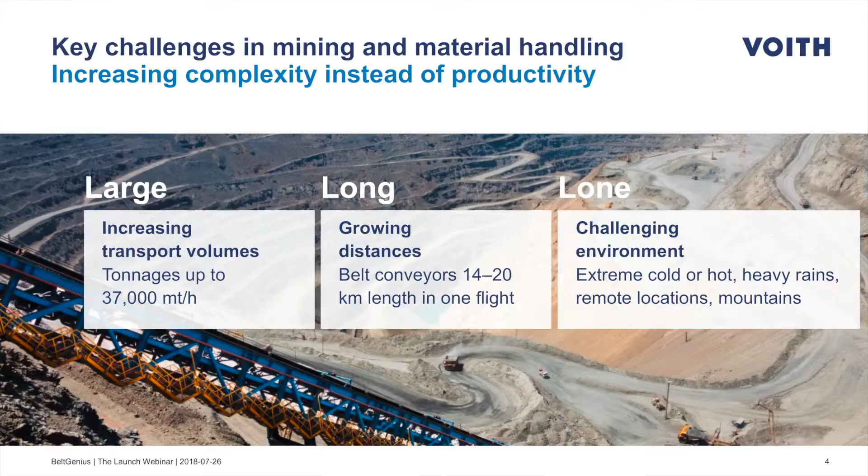These 3 L's lead to increasing complexity instead of increasing productivity. We all know an increase in complexity rarely is a profitable factor. Instead, risk for unexpected downtime is growing. No possibility to build challenging conveyors redundant. Conveyors are built to work reliably, not to be efficient. Economic pressure is huge to raise productivity.

As an industry, we have to ask ourselves, are we stuck in an innovation rut? Reluctance to adopt new technology in mining led to an innovation rut. Adoption of digitization solutions bring operational and qualificational risks. The risk of producing huge amounts of data with no sense is obvious.

I promised you to take the shortcut from buzzwords to business value in no time. Here we go. Whatever the buzzwords are, our industry is still facing familiar and down-to-earth problems that were not being solved satisfactorily to this day.

Let's take a look at the belt conveyor technology and operations. Leveled costs per ton and kilometer is subject to great variation. There is plenty of data, but no distillation of meaningful information. Shortcomings in systems, skills, awareness, no benchmarking to others. System downtime is just a minor incident away.

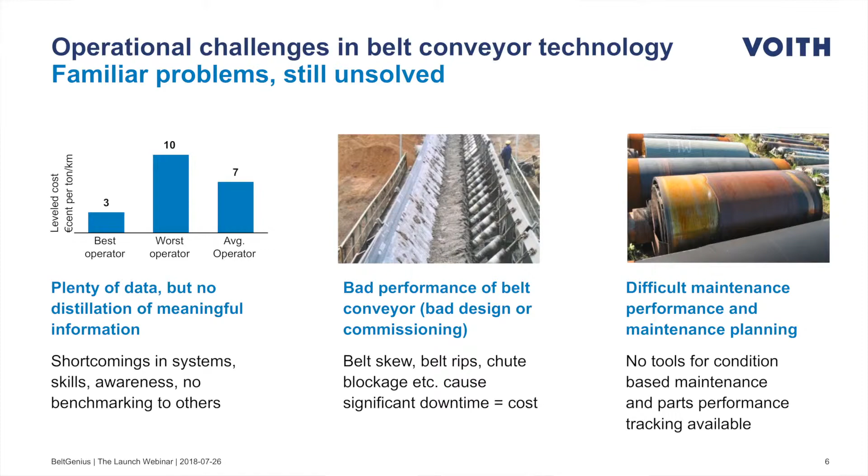Now, you might have guessed it. We have good news for you. The Voith BeltGenius product family has been designed to take on those familiar problems once and for all. Manfred, your turn. Welcome to our webinar.

I'm extremely thrilled to introduce you to the next level conveyor performance with the BeltGenius product family. We have been working on this solution for more than 3 years, and I can't wait to see it in action with new customers across the globe.

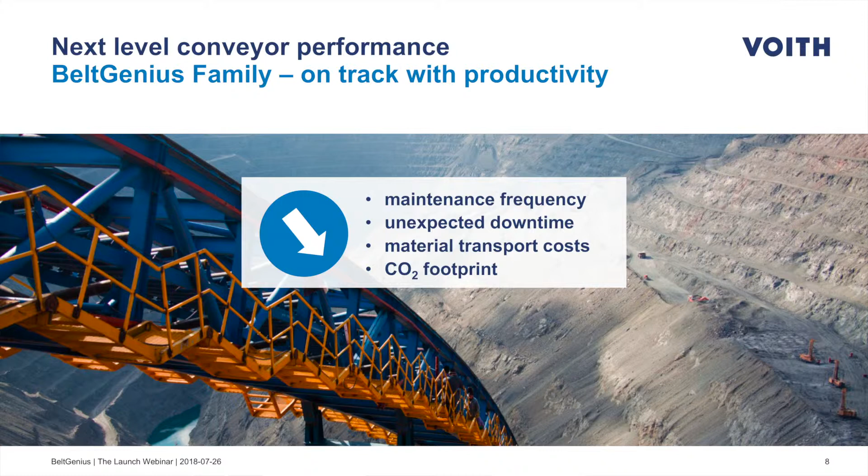As we said earlier, we want to show you how small investments in digital solutions can enhance your mining productivity, and BeltGenius is just about that. It is a product family for monitoring and optimization of belt conveyors and entire conveying systems. In terms of productivity, you can effectively reduce maintenance frequency, unexpected downtime, and total material transport costs considerably. Furthermore, Voith BeltGenius is also helping mines to reduce their CO2 footprint.

So how do we do that? The BeltGenius family currently consists of two brothers. Say hello to BeltGenius Eric and BeltGenius Alex, and you can say goodbye to performance issues and conveyor misalignment.

Many of our customers share the same problem. They lack control. Condition monitoring of belt conveyors or benchmarking of system components based on operating data have been almost impossible to implement. Causes for unexpected failures, downtime, excessive energy consumption, or shortened service life of component often remains undetected. That's when ERIC comes into play.

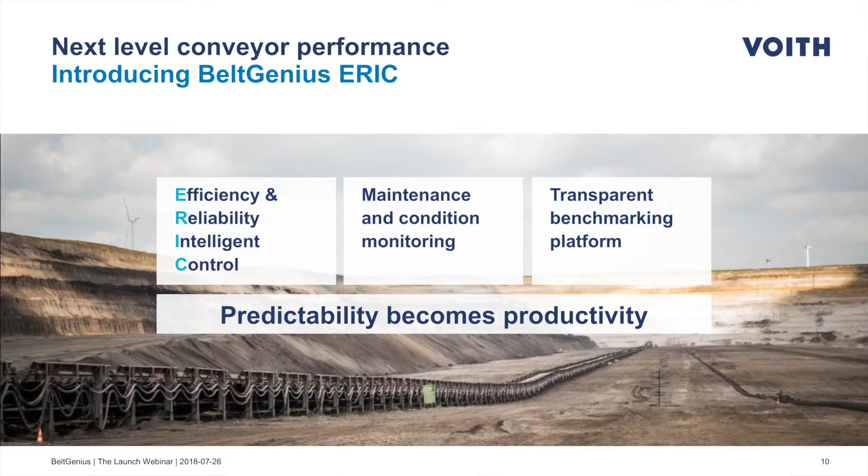So who is ERIC? ERIC stands for Efficiency and Reliability Intelligent Control. ERIC is a breakthrough innovation, not only focusing on maintenance and condition monitoring, but providing a completely transparent benchmarking platform for mining companies.

With ERIC, predictability becomes possible, and in the digital age, predictability is productivity.

How does ERIC work? At its core, BeltGenius ERIC is a sophisticated digital twin of your belt conveyor. This digital twin processes sensor data in real time to calculate the energy performance indicator, or EnPI, of your conveyors, revealing opportunities to improve performance. What's more, you also get the opportunity to identify failures in advance, which increases system uptime.

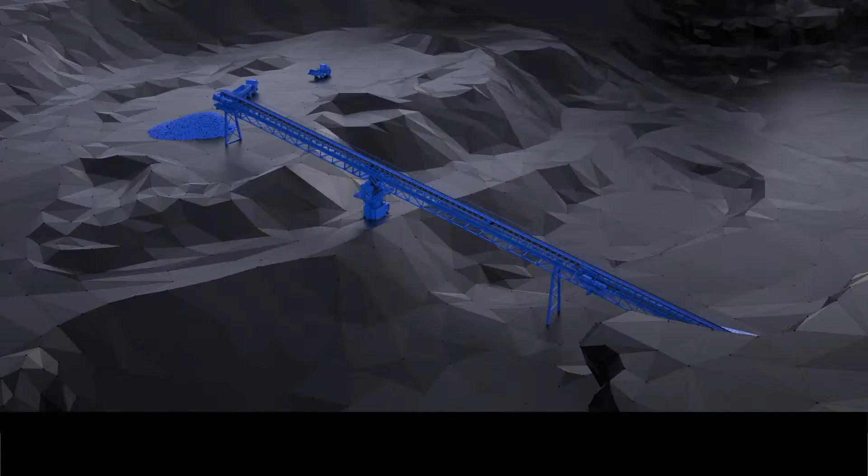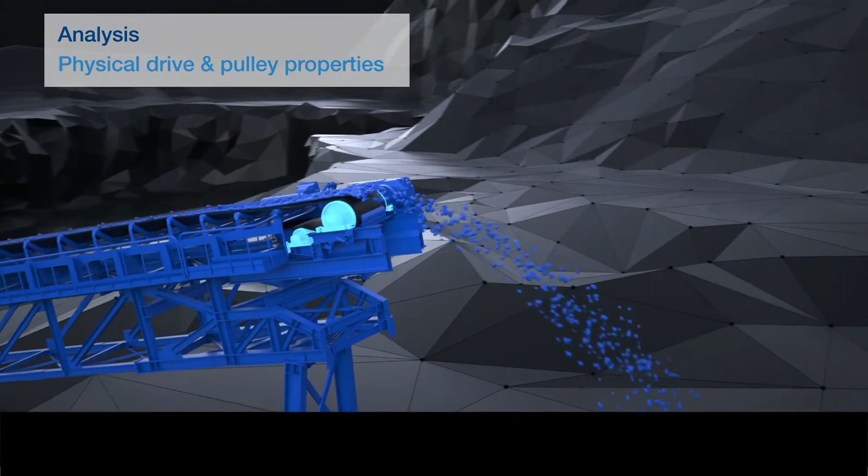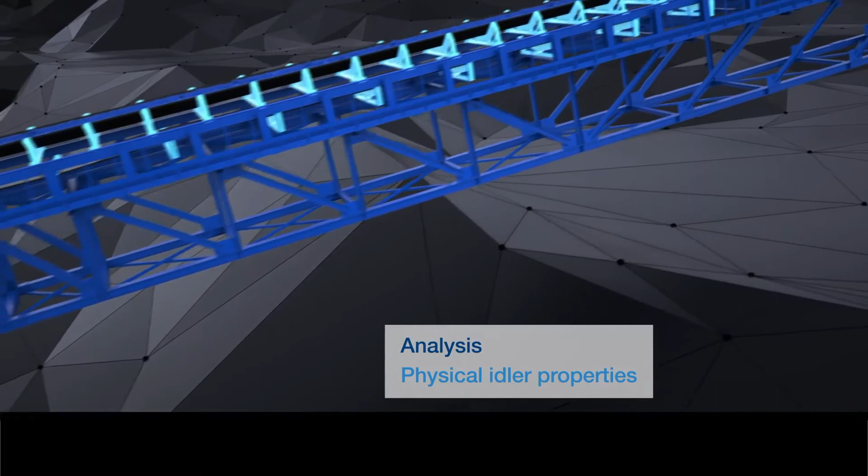Let me show you how we generate a digital twin of your specific conveyor system. As you can see, we first create a structural description of your conveyor from your drawings: height, length, position of the pulleys and the drives, and so on. Then we describe the individual properties of the belt, the drives and the pulleys, the idlers, the tensioning device.

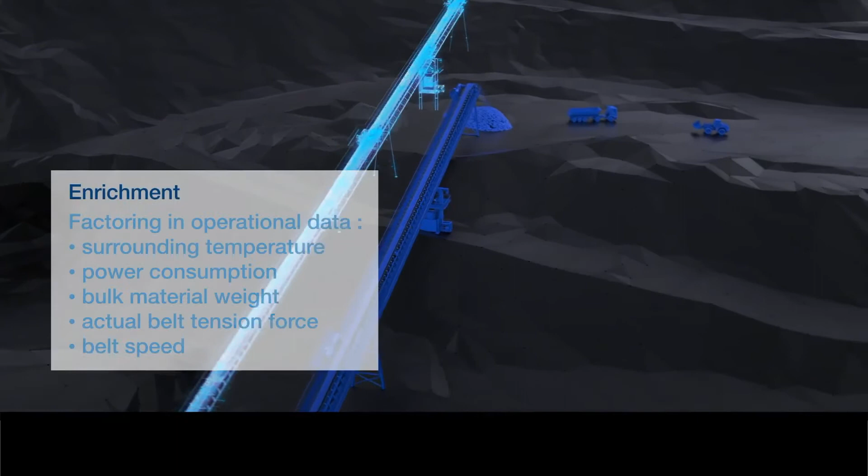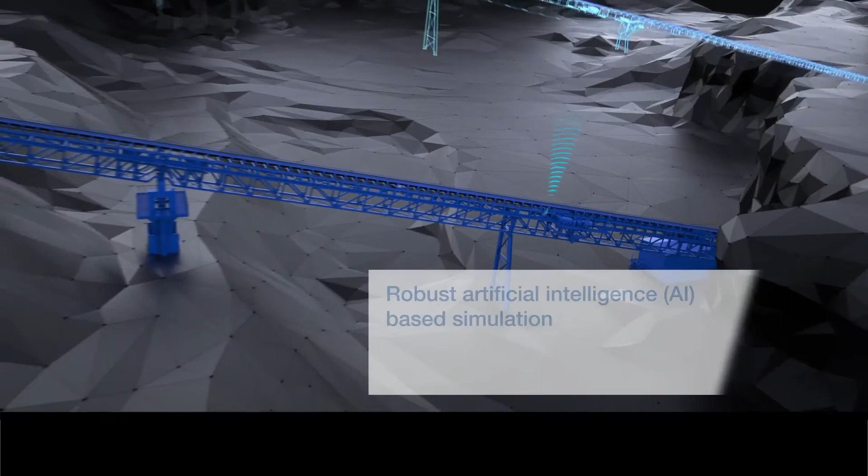During runtime, we feed to this digital representation of your conveyor the following operational data: power consumption of all drives, load signal of the belt scale, the belt tension, the belt speed, the surrounding temperature. By adding motion data for individual belt segments generated via RFID tags, we can even identify the properties of each belt segment. The system automatically adjusts the individual properties so that the calculated power demand perfectly hits the measured one.

Now we have a perfect digital twin, giving us all the insight we need. Once the digital twin is set up and running, ERIC provides you with dashboards containing valuable information on your belt conveyor system, such as conveyor energy efficiency, performance information for each belt type, and feasible capacity.

What is the value of this information? Let's have a look at the dashboards. This dashboard gives you a bird's view on the energetic health of your conveyor by showing the normalized EnPI. This energy performance indicator represents the specific power consumption for the transported material and kilometer of horizontal transport distance at a constant load and a constant ambient temperature.

The first drop in this chart was caused by a temporarily missing power signal detected by BeltGenius ERIC. A sudden growth by 10% happened due to the reduction of the belt tension by 25%, which caused higher losses. Adjusting the belt tension restored the original value.

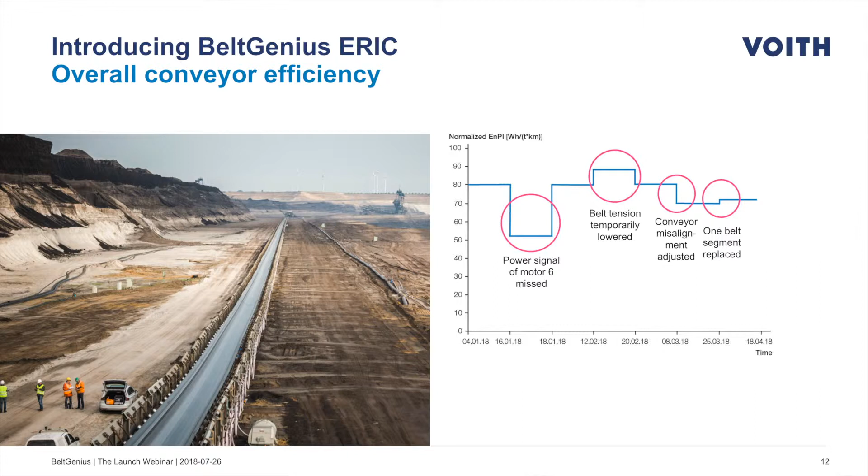Further reduction of the energy consumption was achieved by the adjustment of the idler misalignment, reducing the EnPI by 12%. Replacement of one worn belt increased the EnPI a little bit, since new belts have a higher indentation rolling resistance at start.

Your benefits: overall conveyor efficiency at a glance. Sudden changes indicate a malfunction. The system then triggers an alert.

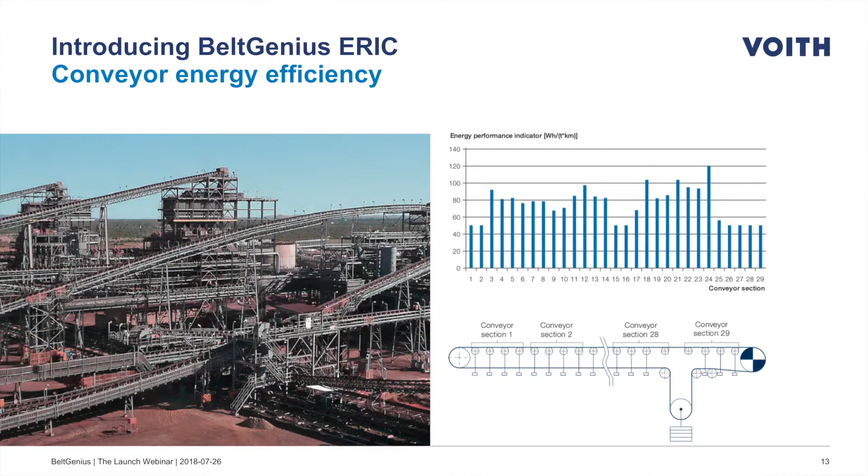The next dashboard shows that your system is being divided into conveyor sections. Thus, you can easily track the energy performance of each section by its energy performance indicator. In other words, it shows you the potential of improvement and which segments are causing the highest energy losses. If the overall conveyor efficiency changes abruptly, you can use this dashboard to see if something happened along the conveyor.

Your benefits: identification of bad-performing conveyor sections caused by misaligned supporting structure or stiff rollers, and a starting point for energy efficiency and wear reduction improvement. This dashboard gives you information on the performance of each belt segment.

Belt conveyors typically include belt segments of varying quality and from multiple manufacturers. The digital twin calculates the EnPI for each belt segment individually using RFID tags inserted into the belt. The result is clear performance information for each belt type used in the conveyor.

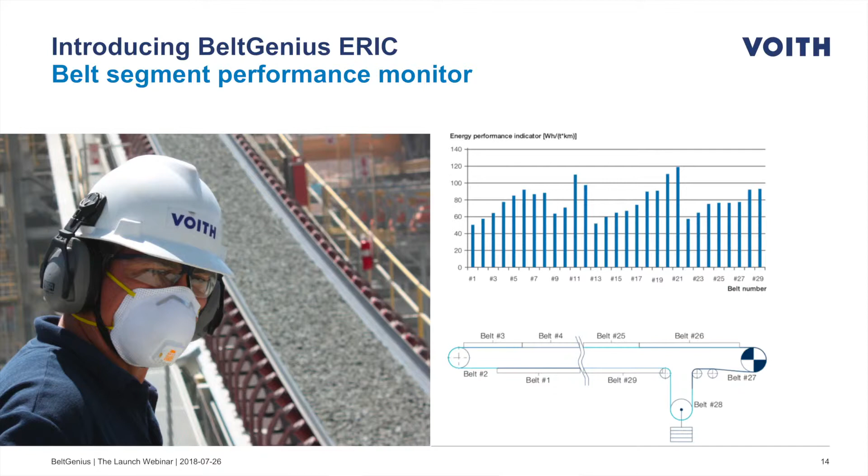Your benefits: identification of good and bad performing belt segments, negotiating power towards belt suppliers, reducing power demand and energy consumption over time by selecting the good performing belts in replacements. The feasible capacity dashboard gives you a visualization of installed power versus demand power, as well as mechanical and electrical reserves.

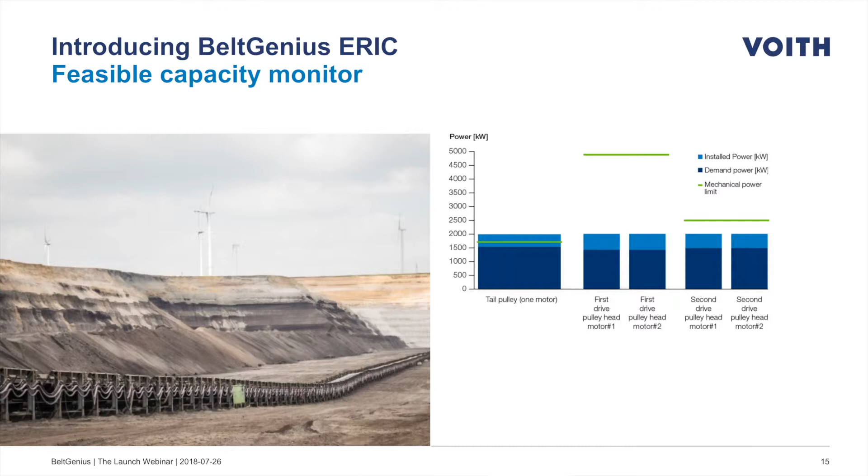The ERIC digital twin constantly calculates the physical torque transmission capability of each drive pulley. The dashboard shows the current load reserve before electrical or mechanical overload occurs. This allows the conveyor to operate at maximum mechanical and electrical capacity, all while ERIC helps protect the pulleys and belt against slippage, which can considerably reduce the service life.

Your benefits: optimal conveyor utilization regarding maximum tonnage, identification of possible imbalance between different drives, disclose bottlenecks for increasing production rate, starting point for optimization of conveyor system. ERIC is quite a colleague, don't you think?

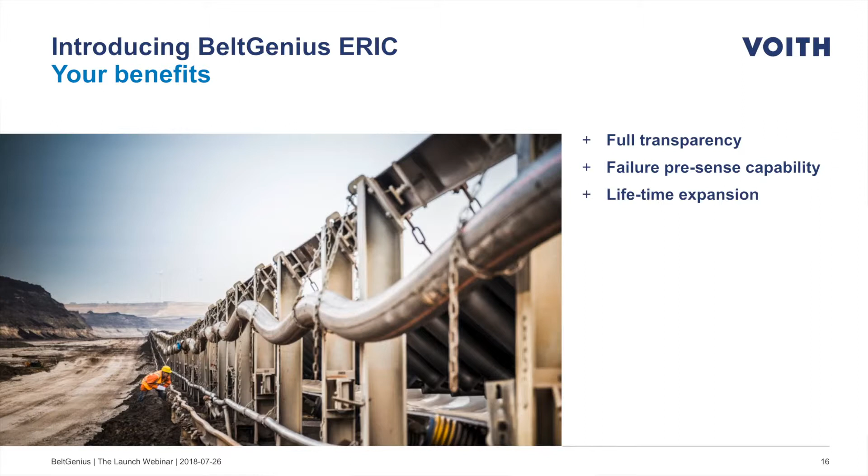Let's wrap up what ERIC can do for you. Full transparency of energy efficiency in conveying systems. Failure pre-sense capability avoids unexpected downtime, extends lifetime of major components such as drives, belts, pulleys, etc. Significant and sustainable reduction of bulk material transportation costs, measured benchmarking of different belt manufacturers and qualities, enables strategic approach to CapEx allocation for long-term optimization, contributes to a sustainable and significant reduction of the CO2 footprint of a mine.

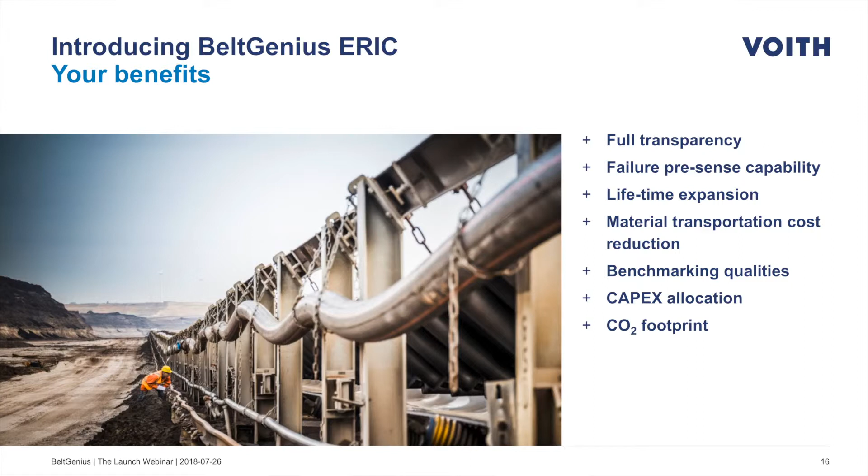The best thing about ERIC? ERIC has a brother. His name is Alex. So, who is Alex? Alex stands for alignment expert. It seems like a trivial problem, but anyone in the industry knows how annoying and costly belt skewing really is.

Unexpected downtime and high repair costs are the result when belt conveyors are not properly aligned. When excessive wear occurs, complete belt sections have to be replaced. Alex is a real alignment expert, detecting potentially catastrophic issues in idler installations.

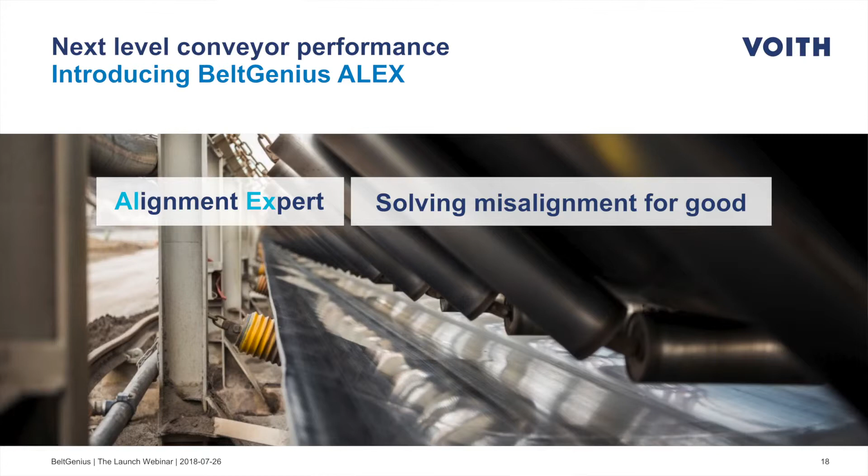Newly designed 3D sensors allow extremely high accuracy for maximum benefit. BeltGenius Alex detects any misalignment of the belt and helps increase the lifetime of your mining equipment, leading to significant cost reductions. With Alex, we are solving misalignment for good.

How does Alex work? Belt Genius Alex consists of a dual sensor chain. The sensors are mounted to both belt edges during the data recording procedure, conducted by Voith service engineers. The 3D sensors detect any misalignment of individual idlers, garlands, or specified idler racks.

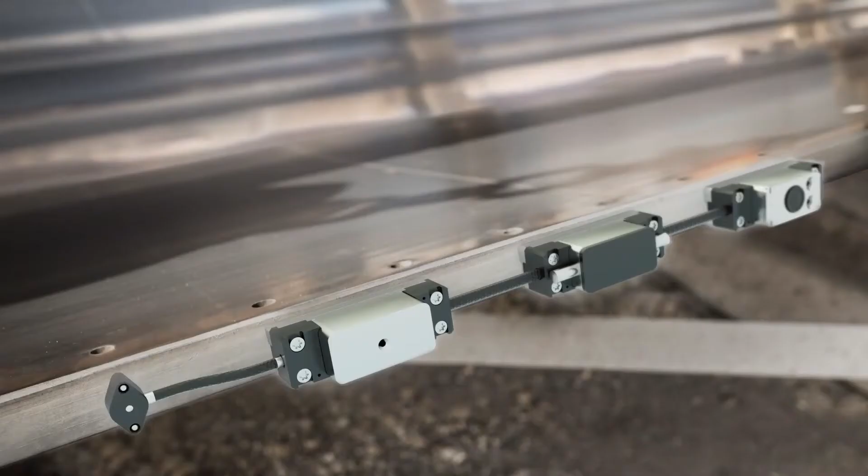Let me give you an insight into the sensor technology we are using. What we see here is a high-tech Alex sensor chain. First, the gyroscope module, which tracks the rotational speed as the main indicator for vertical misalignment.

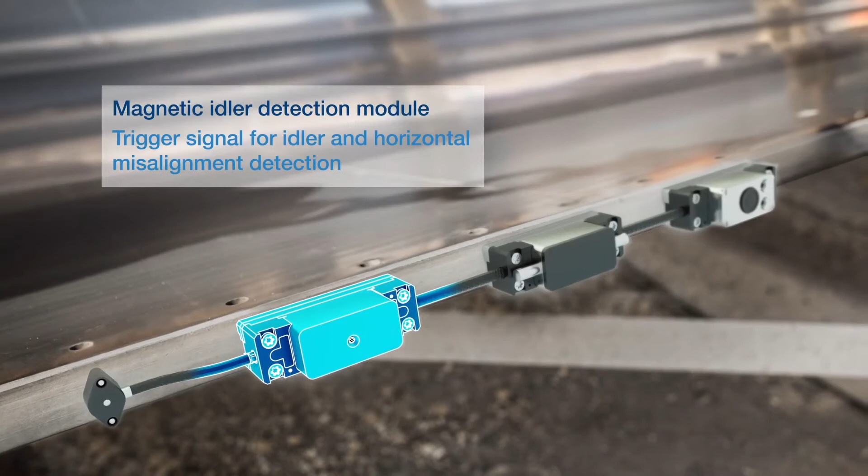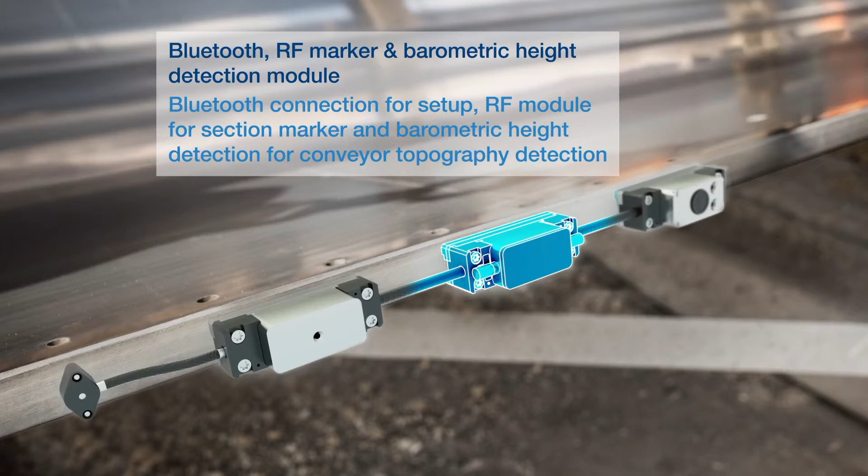This is the idler detection module, delivering position and height of each idler and, by comparing left and right, determining horizontal misalignment of each idler station. The third module contains the Bluetooth connectivity for setup and the RF marker, as well as a barometric altitude sensor, both detecting the conveyor topography. The last module stores the data on a microSD card and supplies the power.

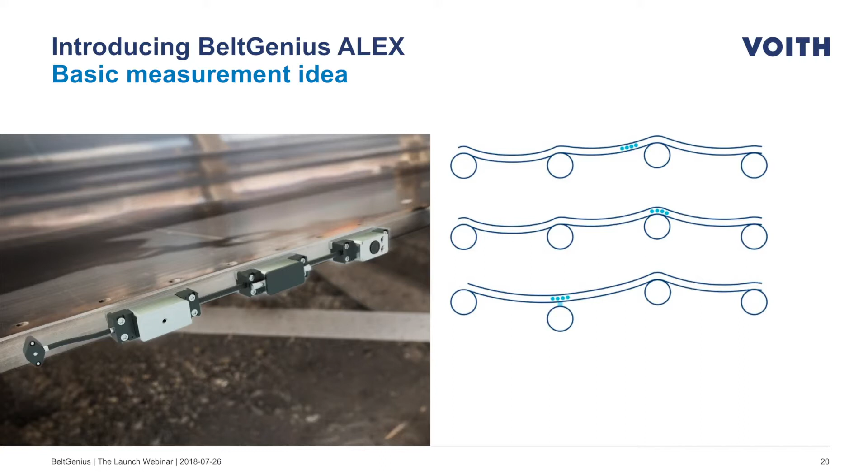We use the sensor technology to apply a basic measurement idea. Every run over an idler causes a deformation of the belt edge. The gyroscope measures the rotational speed, which is used to calculate the vertical misalignment. The signals from the two idler detection modules deliver the exact horizontal position of the two wing rollers, and thus the horizontal idler misalignment, which is the main reason for belt skewing.

So, what is the working principle of Alex? How do we use the solution? Alex does not become a permanent part of your conveyor system, but rather consists of a measurement campaign conducted by Voith service engineers. Let me show you the process it requires.

As a first step, we analyze your conveyor based on general information about structure, belt and idler dimensions, installed power, etc. Also a discussion with your local experts about any known issues and a physical check of the conveyor is part of the preparation. Then the sensors will be installed.

This will take roughly 30 minutes of downtime. The measuring itself is done by running the empty conveyor for about 3 turns. Then the conveyor is stopped. The sensors are removed, which takes about 15 minutes, and the conveyor is released for production.

From the measured data, we generate a comprehensive report which gives you exact information about vertical and horizontal misalignment and instructions how to reduce this. Also, a calculation about the potential improvements in terms of reduction of energy consumption and belt skewing is part of the service.

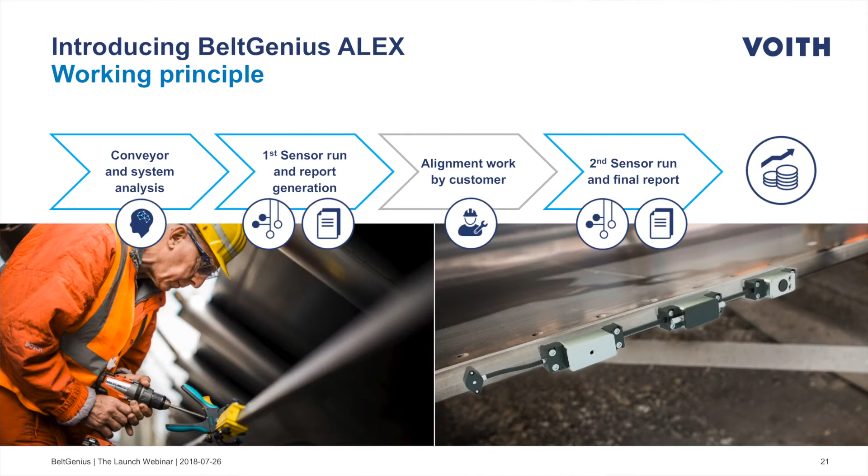When the alignment work is finished, we perform a second measuring campaign, similar to the first one. The second report shows you the achieved improvements, the remaining misalignment, and the calculation of the energy savings. I am sure you and your controlling department will be happy to meet Alex on site.

Let's wrap up what Alex can do for you: an intelligent analytical system to identify ways to improve, verification of alignment correction included, and failure pre-sense capability to avoid unexpected downtime.

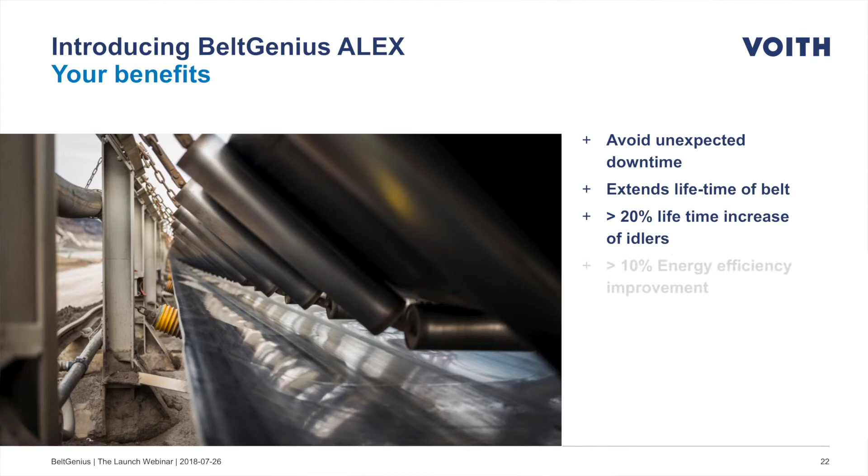ALEX extends the lifetime of the belt, increasing the lifetime of idlers potentially by more than 20%, with energy efficiency improvement for conveying friction losses of potentially higher than 10%, leading to significant and sustainable reduction of bulk material transportation costs.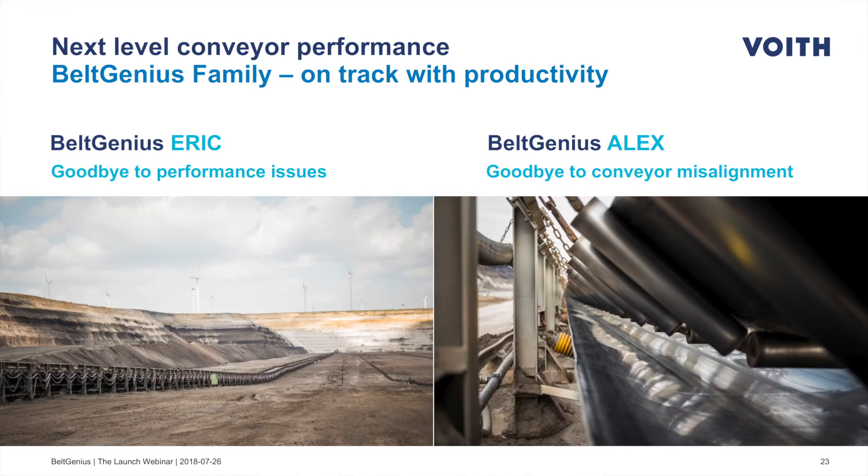A few words on the global market rollout and how we can work together. Eric and Alex were both released in July 2018. That means your local sales contacts are happy to discuss the potential Eric can provide to your conveyor systems. Our belt conveyor engineering team is ready to support projects on site.